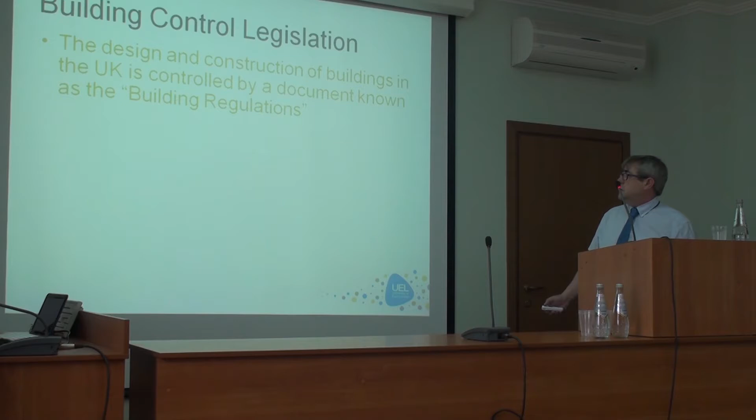So the document we refer to, and this is the technical term for it, is a statutory instrument or a legal document that seeks to ensure the policies set out under the relevant legislation are carried out. So that's the legal definition of what has to happen. Этот документ представляет собой юридически оформленное правило, как должны строить.

So the building regulations are law, in effect, and are a legal requirement for everyone to comply with. Строительные нормативы – это закон, которому должны следовать при строительстве домов.

And that is different from the Eurocodes. The Eurocodes, which we'll come on to, are not law. They are a code of practice. Также он отличается от Еврокодов. Показанный выше нормативный документ является законом, в то время как Еврокоды – это просто стандарты, которым рекомендуется следовать.

However, most people use them as a convenient way of carrying out their structural design. Однако большинство людей используют именно Еврокоды как самый удобный способ строительства согласно нормам.

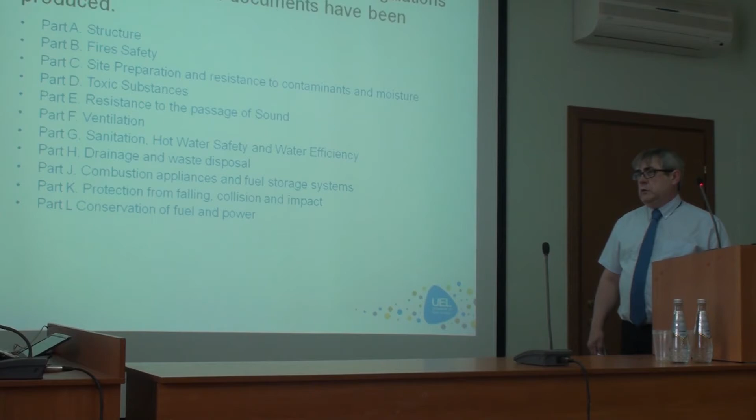Part L: Conservation of fuel and power - effectively this is to do with heat use and how we maintain the heat use within the building, reducing heat loss.

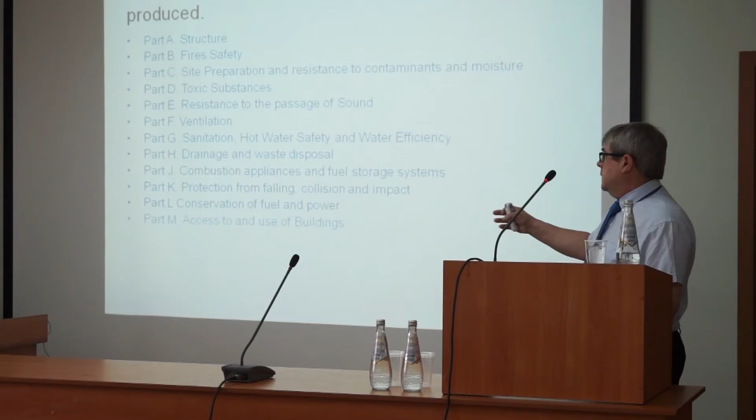Part M: Access to and use of building - that is for disabled access, so the use of the building and the access to the building by people who are impaired in their movement.

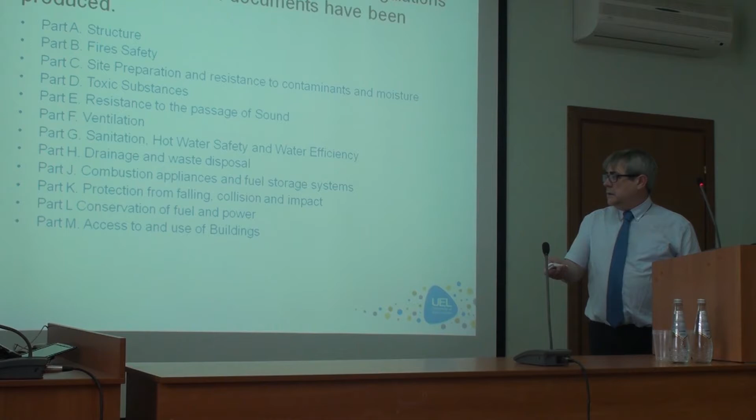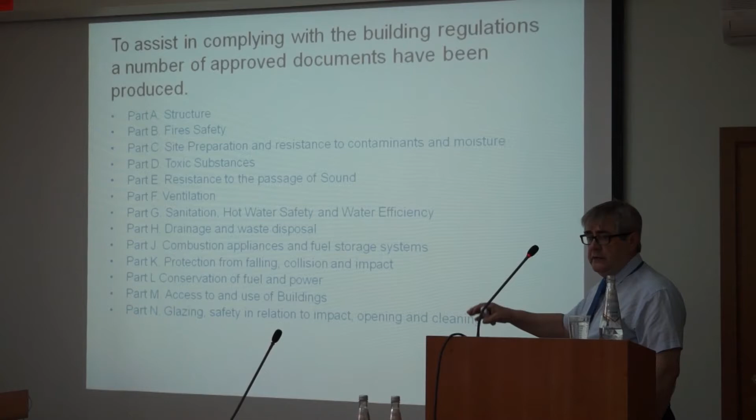Part N is glazing - safety in relation to impact, opening and cleaning. So it's to do with windows: how safe are the windows, making sure they are safe for their use, can they be cleaned, and the way they open.

And Part P, which is the last part, is the electrical safety of dwellings. So all electrical work comes under the building regulations and has to comply with the current standards.

This one in particular is specifically aimed at dwellings or houses, not industrial units or factories - they will be dealt with separately.

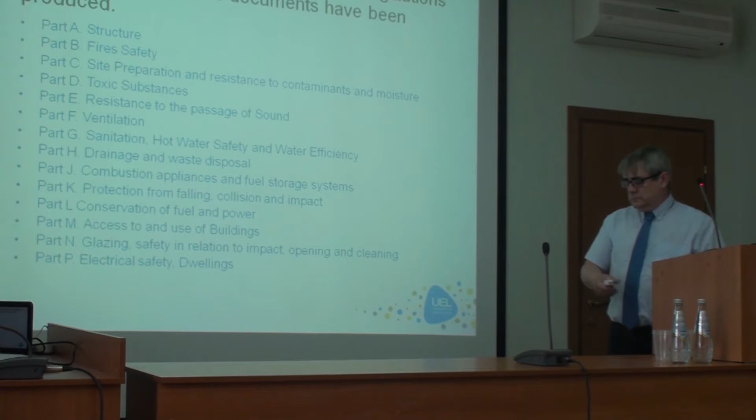Okay, all the approved documents - you can download them free from the internet, so you can access them at any time, and this is the web link. Now we should be able to just open this up from the hyperlink on there.

Все нормативные документы доступны в свободном доступе в интернете. Сейчас мы попробуем загрузить одну из ссылок. The building regulations for the UK are available on what's called the planning portal. Строительные нормативы Соединенного Королевства доступны на этом сайте, и сейчас вы увидите, как они выглядят.

Okay, so these are all the approved documents, and they're all downloadable free, but obviously they're only in English. Здесь вы видите утвержденные документы, которые вы можете загрузить. So if you click on, say, this one, for example, structural safety. Если вы кликните на безопасность конструкции.

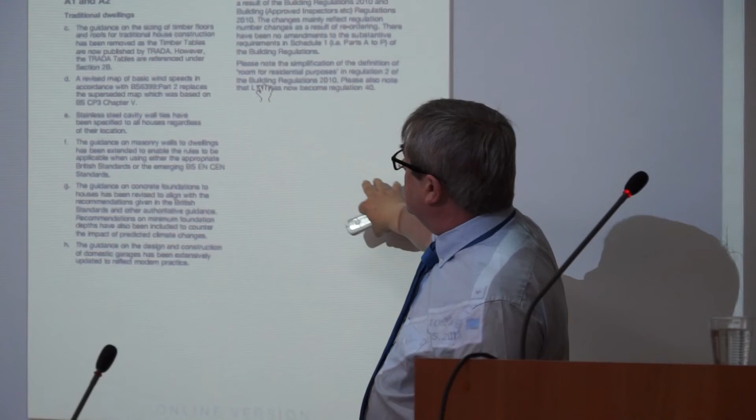And you'll see that as you go through it, the first part tells you how it changed from its last version. On the front cover, it tells you the latest version. This will tell you where we've changed the regulations since 2004. This is 2010 amendments, so it's a 2004 edition, amended in 2010. There haven't been any changes since then. The first page tells you where the main changes have taken place, so if you're familiar with the old code, you will see what the revisions are.

На титульном листе вы видите дату выпуска данных нормативов. На первом листе у вас идут данные об изменениях. То есть, если вы знакомы с предыдущей редакцией нормативов, вы можете просто просмотреть изменения и уже будете в курсе новых стандартов. Если же вы не знакомы с новыми нормативами, то нужно будет изучать весь документ целиком.

Within this one, which is the structural design one, it then tells you what other codes you should be using. So this is not the full code, this tells you where to use what codes. Этот норматив представляет собой нормативы по структурному проектированию. Также он говорит вам, какие другие нормативы вы должны использовать, с какими другими нормативами вы должны быть ознакомлены для продолжения строительства.

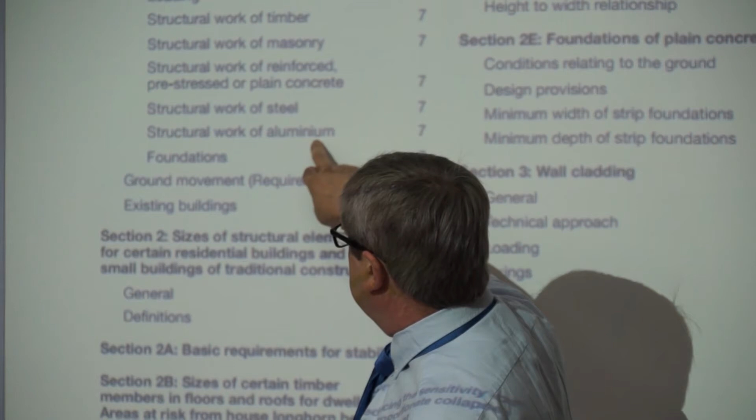То есть каждый норматив посвящен какой-то определенной теме. So if you go up a bit, there's obviously an index, and if you go a bit further, it tells you the different loadings you should take into account: use of structural timber, use of structural masonry, reinforced and pre-stressed concrete, steelwork, aluminium foundations. These are the references that relate to what you should be designing to. Также здесь вы можете найти ссылки на то, что вы должны принимать во внимание - использование древесины, кирпичной кладки, бетона в строительстве, применение нагрузок к данным материалам.

If we just go up a bit more, we can go past the index. So this is the way it's written - it's a very wordy document. But if you keep on going up, okay.

This part here is what the actual building regulations say. So this is the law that says the building can be structured such that combined and imposed loads - it tells you how you should design it, but doesn't give you any other information than that. That is the actual interpretation of the Act, and the rest of the document is to enable you to carry out that instruction. Сначала вы можете увидеть непосредственно нормативы, которые являются частью закона, то есть те требования, которые должны выполняться. Дальше уже вы сможете найти объяснение, каким образом выполняются требования и что вы должны делать.

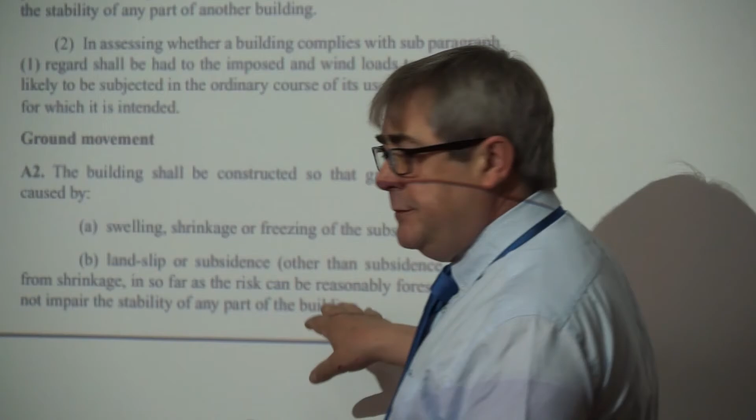So, for example, it says the building should be constructed so that the ground movement caused by shrinkage, swelling, freezing or subsoil slip doesn't impair the stability of the building, but that's all it tells you. То есть, например, здание должно быть построено таким образом, чтобы обеспечить безопасность находящихся в нем людей, но это не дает вам никаких деталей, не объясняет, как это нужно сделать.

So it's up to you as a designer to comply with that and make sure the design you do is not affected by these conditions. И это ваша задача как проектировщика решить данную проблему и построить такой дом, который соответствовал бы требованиям, но отражал ваши идеи.

If we go up a bit more, just keep going, I'll tell you when to stop. That's okay, yeah, keep going. Told you about the codes of practice, and then go on.

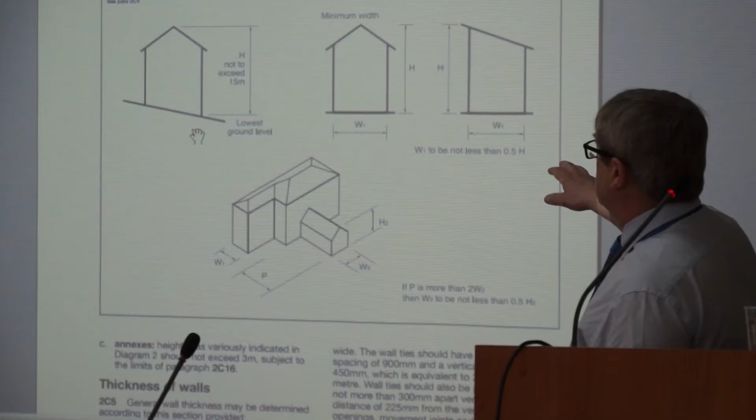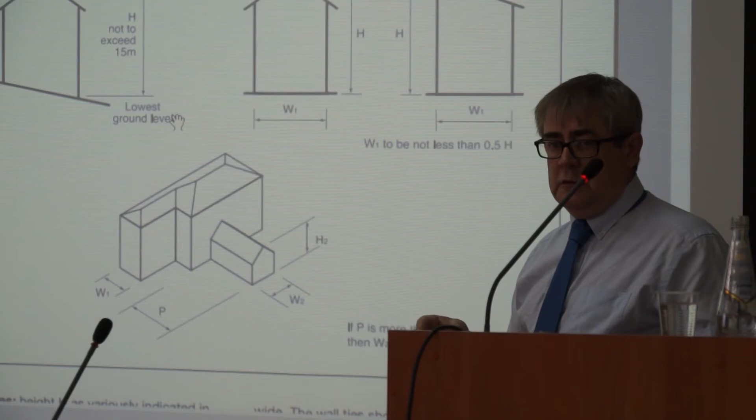Okay, there's some guidance on the restrictions on this particular code. This gives you the size and proportions of certain buildings that the code applies to. Outside of that, you need to use general engineering principles for your design. This relates to certain sizes and limits the design.

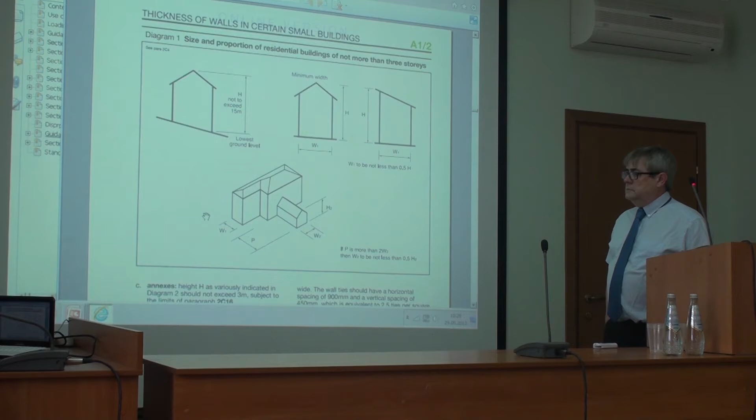Just up a bit more, and I think we'll go back to the normal slides. So it gives you all of these diagrams about how you can interpret and effectively the scope to which this code will apply.

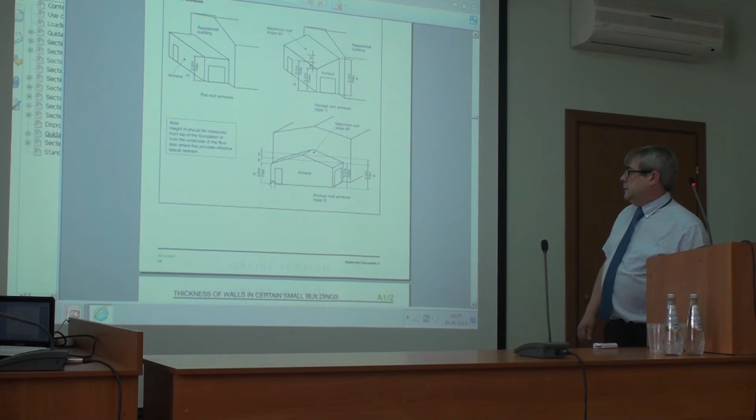Okay, if you go up a bit more, that'll be it. So it gives you certain parameters for the way you can use particular things that only relate to this code.

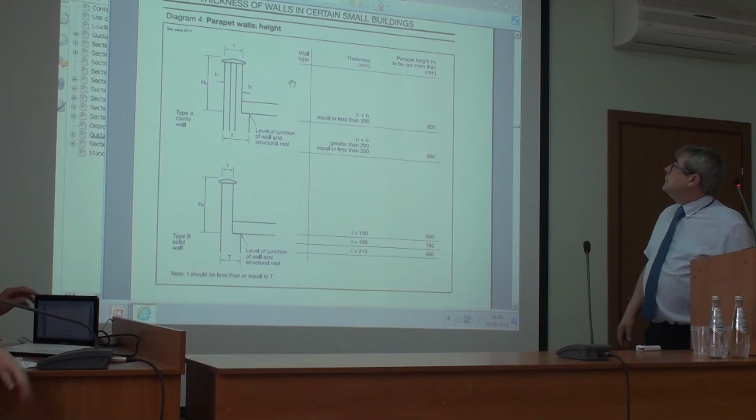Can we go back to the presentation now? That's it, thank you.

So these documents are very extensive, but they're not exhaustive. In turn they refer to additional documents, such as the Eurocode and previous British standards.

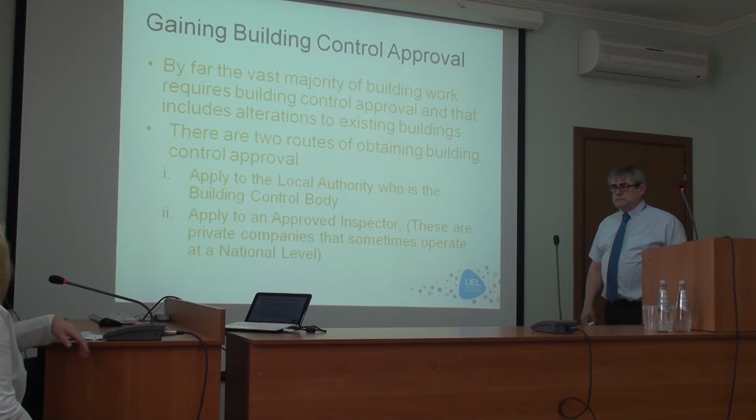The approved inspectors are relatively new. They are a recent addition to the construction industry.

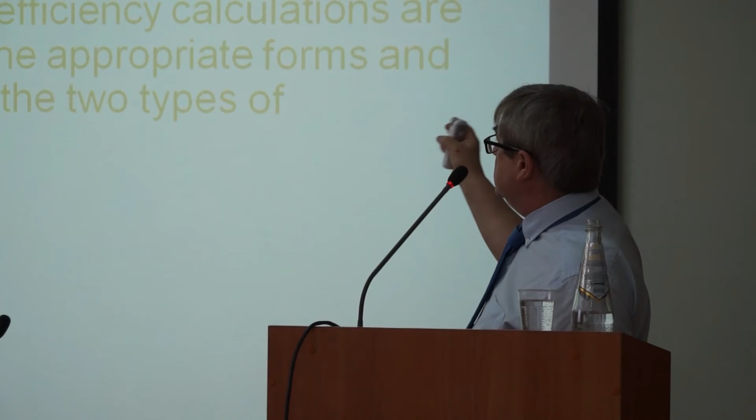So the process of obtaining building control - they're the people you apply to. What you need to do is produce your working drawings and any associated calculations, required energy audits or efficiency calculations, and submit them with the appropriate forms and a fee to either of the two organisations.

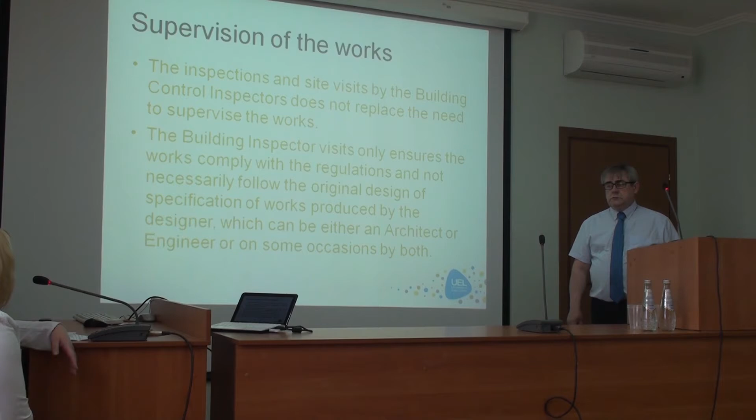Planning control, I thought I'd throw this in as well, is something slightly different. So building control, it doesn't mean that you have the permission to build a building.

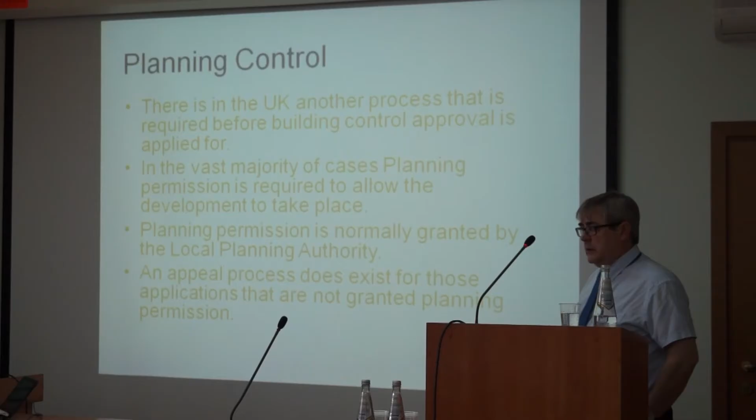Instead of going through all the documents, they're free to download, but the principles are there. They're the processes that we would need to go through in order to build a building.

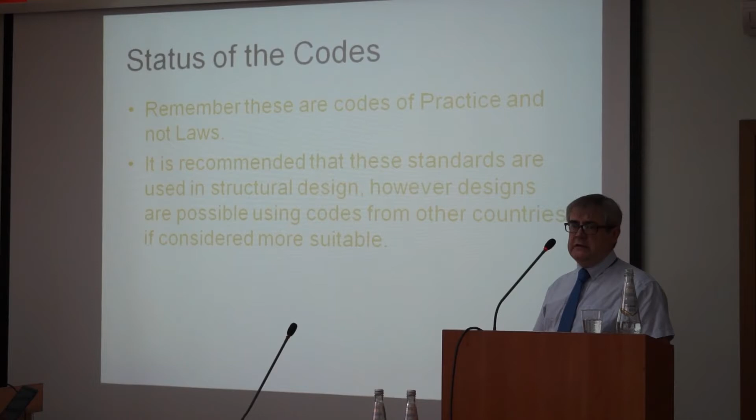The majority of companies will use in the UK the Eurocodes because it's most appropriate and it's easy to follow. But there will be certain cases, because all codes throughout the world are based on the same principles of engineering design.

В Соединенном Королевстве чаще всего используются еврокоды, потому что они наиболее простые в использовании и соответствуют всем требованиям. Однако большинство кодов построены на одних и тех же принципах, то есть вы можете варьировать в зависимости от своих пожеланий. But there will be subtle differences between some of the codes, and some will allow certain conditions that others won't, and therefore in certain circumstances, in very extreme conditions where you're designing something very specific, it may be appropriate to use an alternative code.

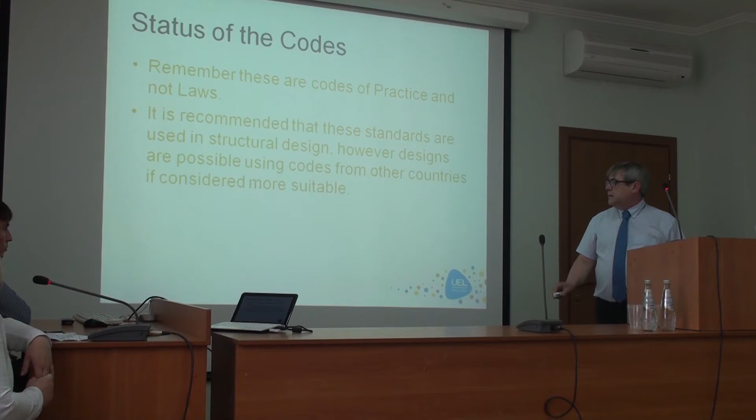Однако существуют и различия в каких-то свойствах, то есть если ваш проект специфичен и если он отличается от всех остальных, если у вас какие-то особые условия, то вы можете использовать именно те коды, которые подходят вам. But you can produce your designs using the fundamental principles of the use of structural concrete or structural steel. However, you need to demonstrate in your submission that you comply with the fundamental grounding rules of engineering. При проектировании вы можете пользоваться всеми фундаментальными принципами, однако при оформлении документов вы должны перечислить, какие требования

вы соблюли и какими кодами и стандартами пользовались. So all the structural calculations you do for the design of a building, a roller coaster, or a retaining wall will be checked by the inspectors, first of all as independent inspectors. Вся информация, которую вы указали, будет проверена независимым экспертом.

So, Eurocodes. These are a new set of European structural design codes for building and civil engineering works, and intend to be mandatory for all European public works, and likely to become the ones adopted by the private sector, but they don't have to be. The intention really was for public works, and to bring some harmony across Europe and comparison between different countries, to have the same designs.

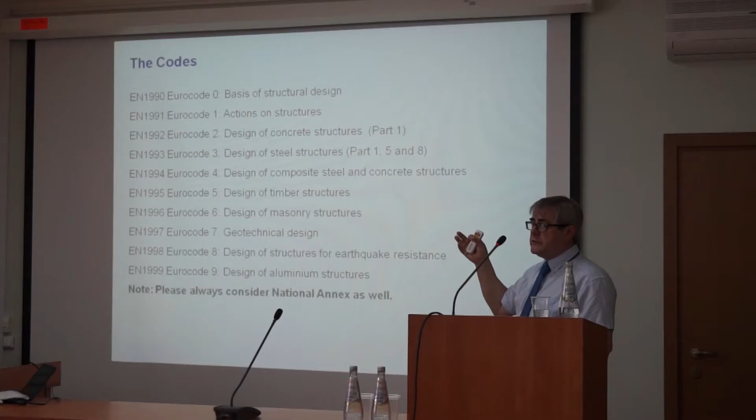They're split into different materials, but the very first one is the basis of structural design, how structural design should be carried out, and the next one, code 1, is the actions on structures - that's the loads applied, what load will be applied to the structure and how.

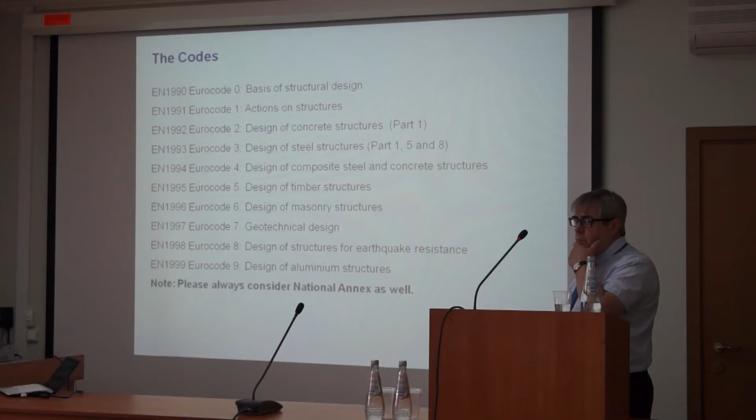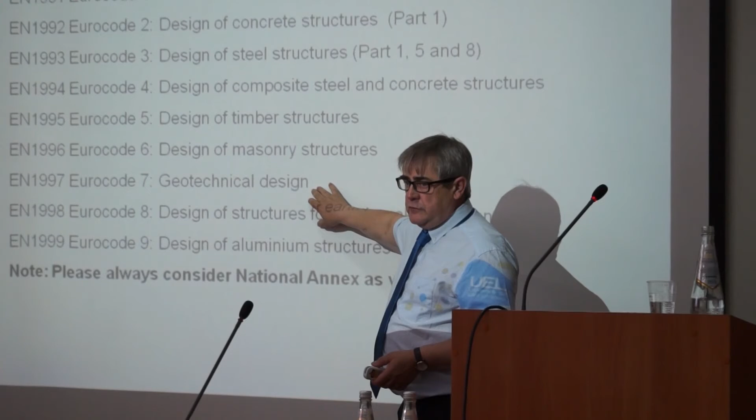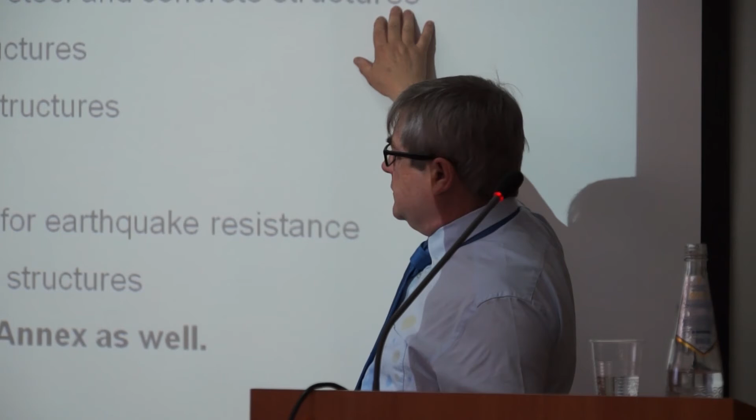So these are all ultimate limit state design, and for the UK the biggest change was in timber structures and geotechnical design. The rest were very much limit state design before we started changing to Eurocodes. Concrete and steel were always in ultimate limit state. Composite structure probably wasn't, but definitely timber and geotechnical design were not in limit state. So these have been the biggest changes to us operating the Eurocodes.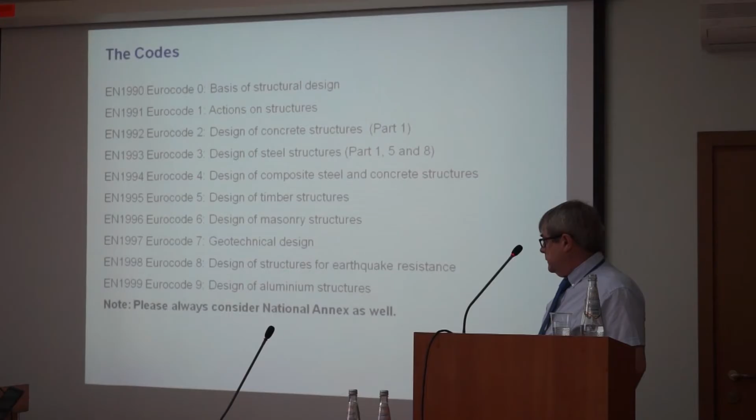Okay, but with all of these, you still have to apply the national annex to each one. So, for example...

This is the website for the Eurocodes, but they're not free.

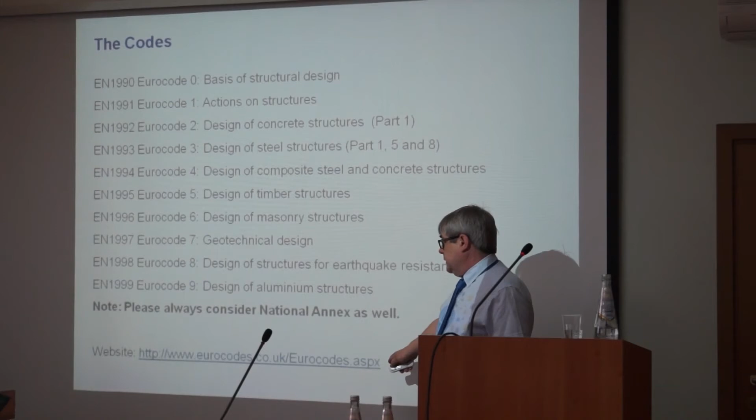Okay, so for example, if we look at the Eurocode design of concrete structures, this is the front cover of the Eurocode.

And then there's a national annex, which is general rules and rules for buildings. So you need to read both of these together to be able to design reinforced concrete.

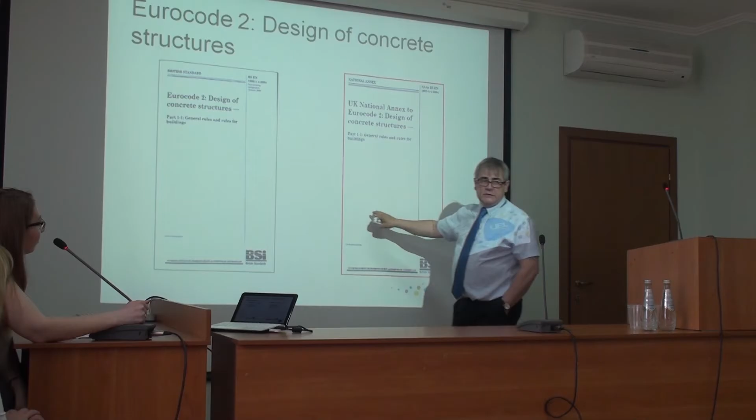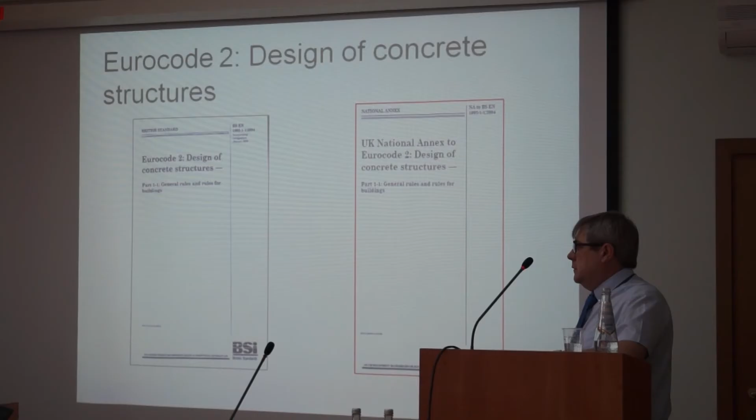So you're probably more than aware that the analysis of the structure will use fundamental tools and software to analyse the way the structure behaves. However, it's then how you transform that information from the analysis into the design of the member that will then resist the loads applied.

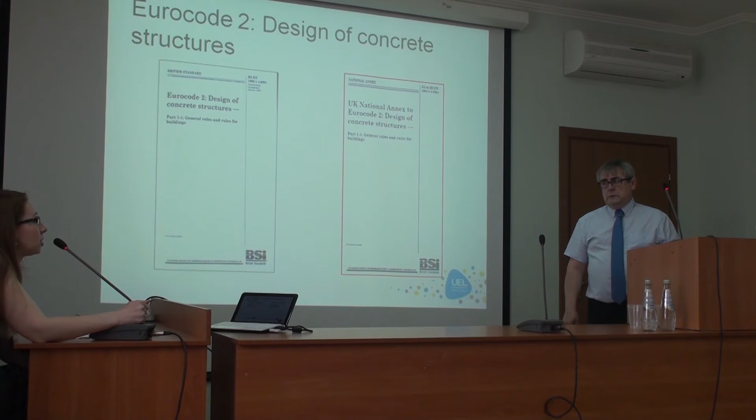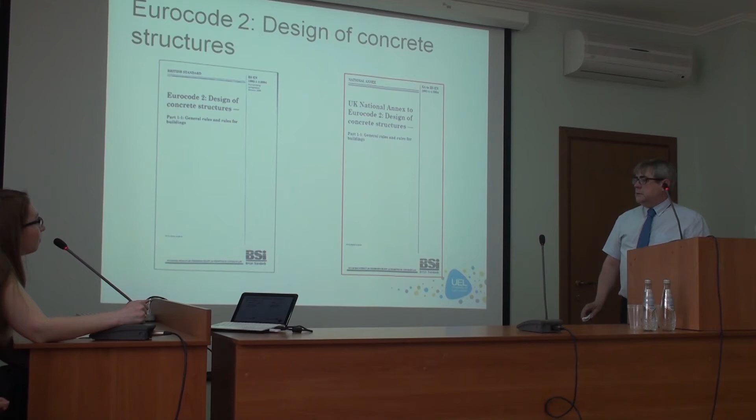So it distinguishes principles and application rules. So this is, I'll open it all up. Okay, so the principles, the general statements, definitions, there's no alternative.

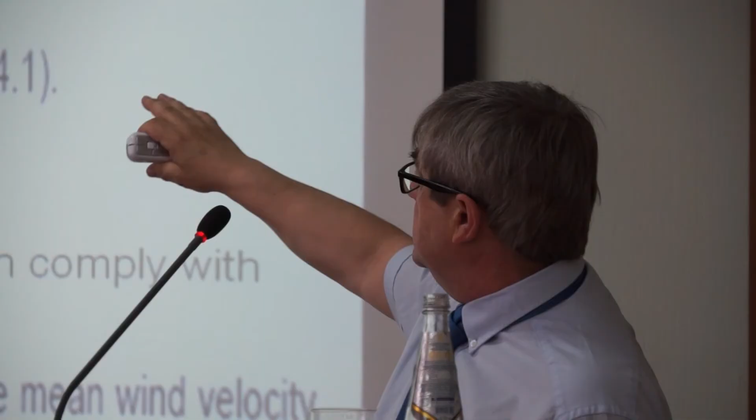Requirements and analytical models, which there's no alternative. Is permitted unless specially stated. What they're trying to say is that the code says you shouldn't use anything other than this. However, you can use alternative ways of designing things. This is what's preferred, and this tells you the principles which can be changed and which can't be changed. And it's a matter of reading through the codes to understand in depth what you can and what you can't do. It's far too complicated to go through anything other than that.

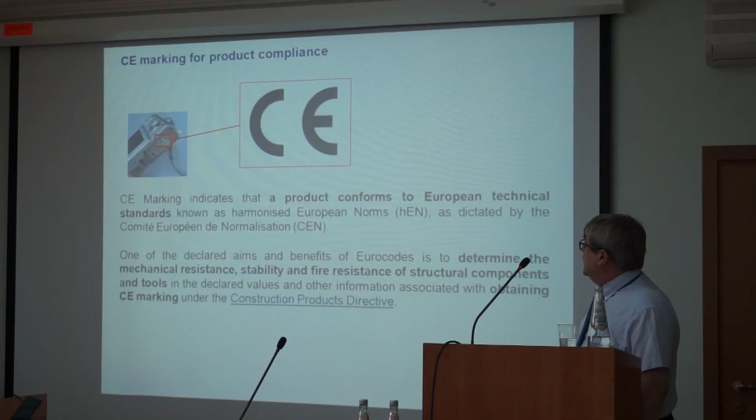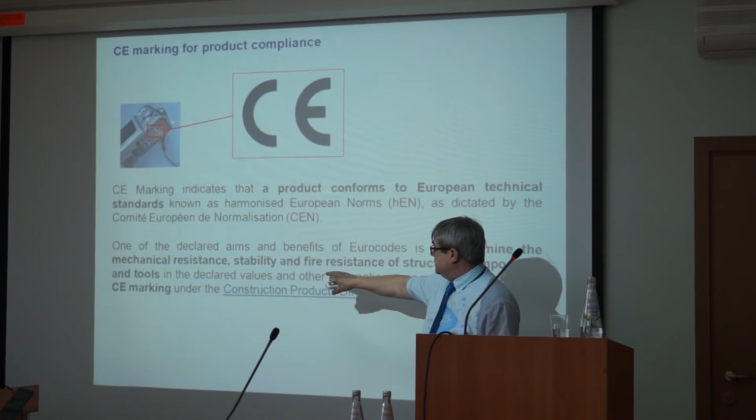And it's all to do with effectively the CE marking. So CE is a European technical standard for harmonised norms throughout the EU, and part of this is to determine the mechanical resistance, the stability, fire resistance of structure components, and that complies to buildings as well. So effectively, when you carry out your design in accordance with the Eurocode, you are complying with the CE marking.

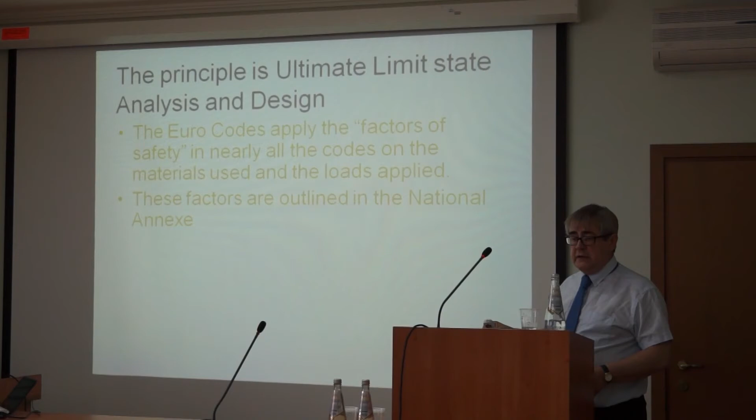What's live load? Live load, people walking about.

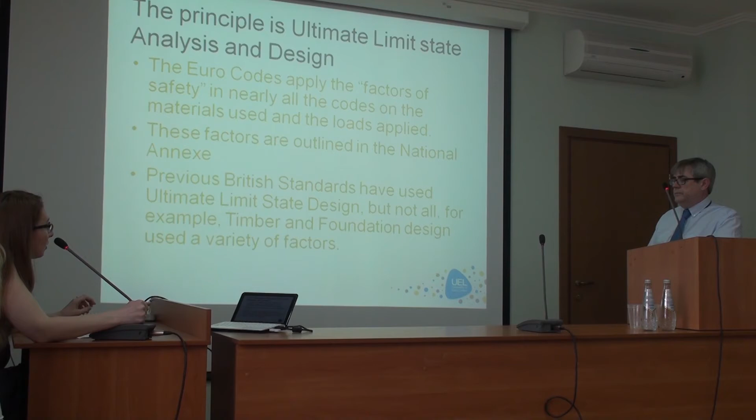So limit state design, this you're probably very familiar with, so I'm not going to go through it in great detail, because I'm sure it's the way that you design things anyway. But limit states relate to beyond which the structure will not satisfy the considered requirements.

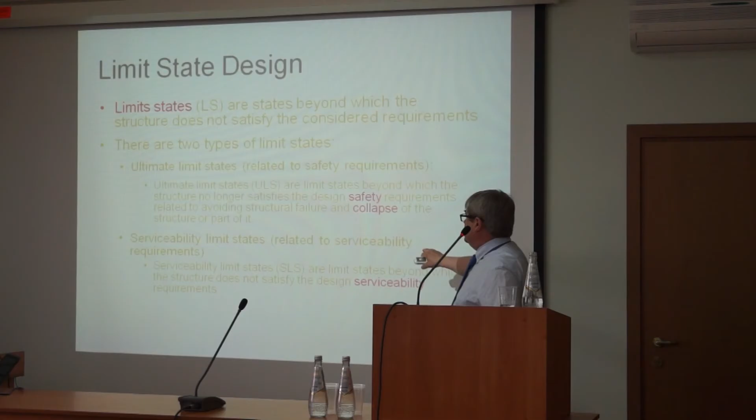Okay, well, this is just to ensure that it doesn't collapse, and this is to ensure it's serviceable. And the serviceability and collapse are two different things. For example, on a timber floor, it may sag too much, and that will then fail under serviceability, but not collapse.

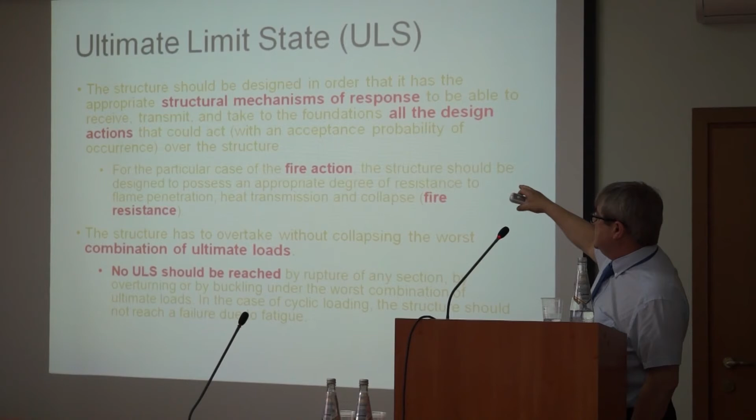And then ultimately, the structure should be designed in order that the appropriate structural mechanisms of response are able to receive. This is really the definition of ultimate limit state. I think they can read it afterwards, but this is saying to you, effectively, that the structure will respond to the loads applied without failure.

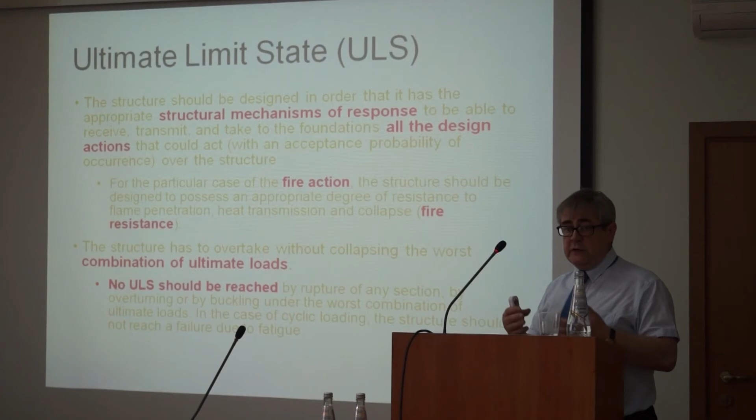And this is all based on probability. So the loadings that apply have a statistical nature.

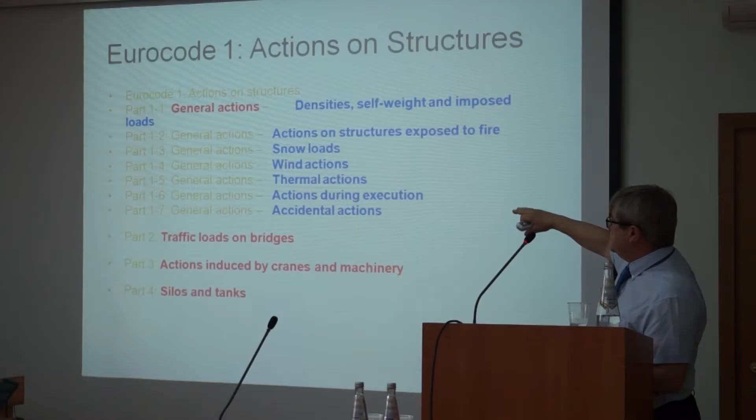If you look at Eurocode 1, very briefly, it looks at the different actions that take place. These are the actions that would have to be applied to the structure: densities, self-weight and imposed loads on the structure, actions on structures exposed to fire, and as you can see, snow, wind, thermal.

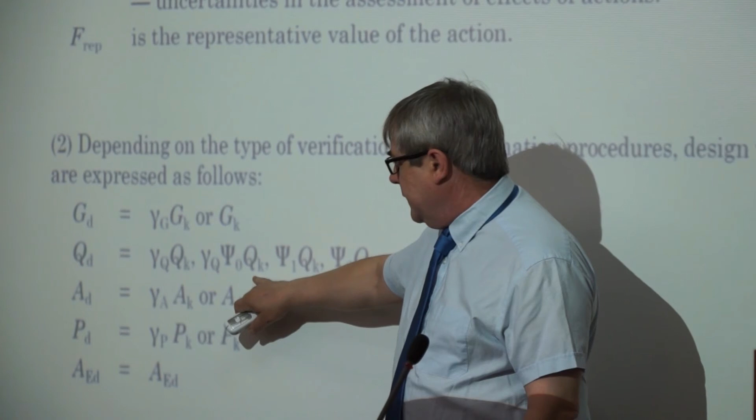So there's various parts of the code, and you would relate to all of those. This is the way the code is made up and how the loads are applied. For this particular talk, it's too complicated to go through how you apply all the different factors, but you can see the factors and these are the components that make up the load. So QK would be an applied load, and these are factors that you add to the load or multiply through to get your ultimate loading. There's a combination of different expressions used, but you need to read through the code and look at some of the guides on how to apply those factors.

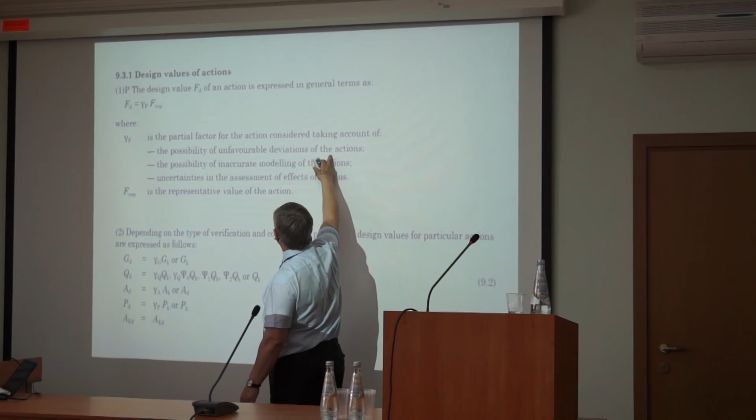For this example, this is a partial factor. This will take into account unfavourable deviations from the actions, the possibility of inaccurate modelling. There'll be a factor you use, and that depends upon your quality control and what material you're dealing with.

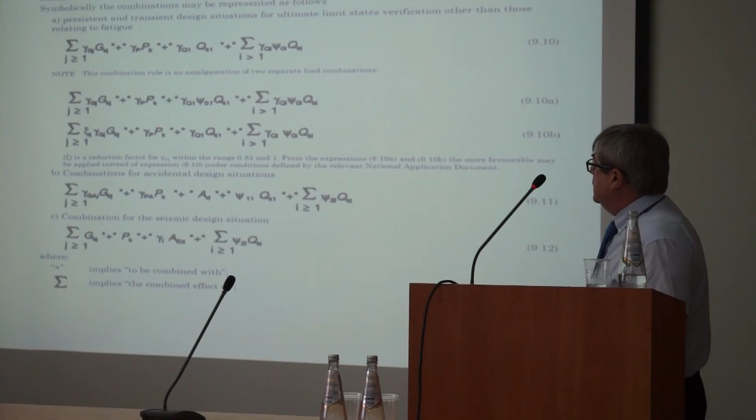You can see the combination of codes are made up. At the very top, there's design values for actions in use of combinations. So persistent, transient, accident, seismic have different values, and it's a summation of these different values that give you your ultimate loading.

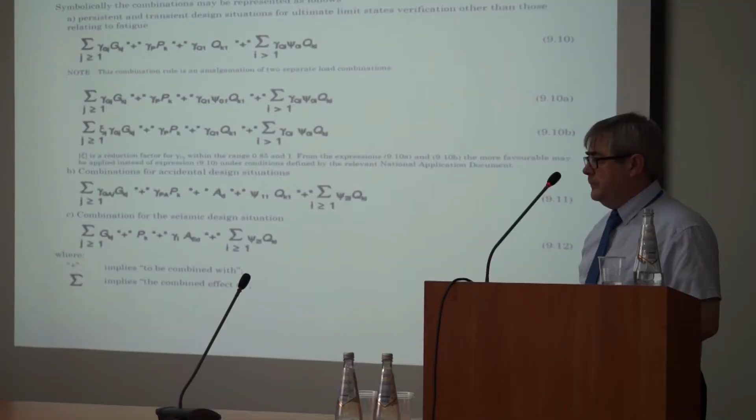These look far more daunting than they actually are.

Scary? These look frightening. Yes, definitely. Too many things.

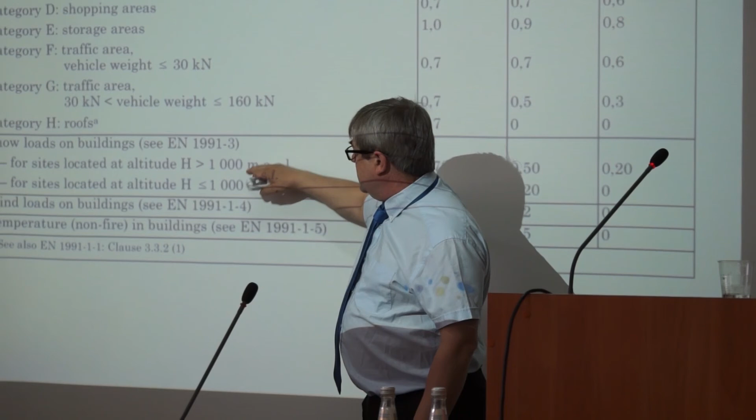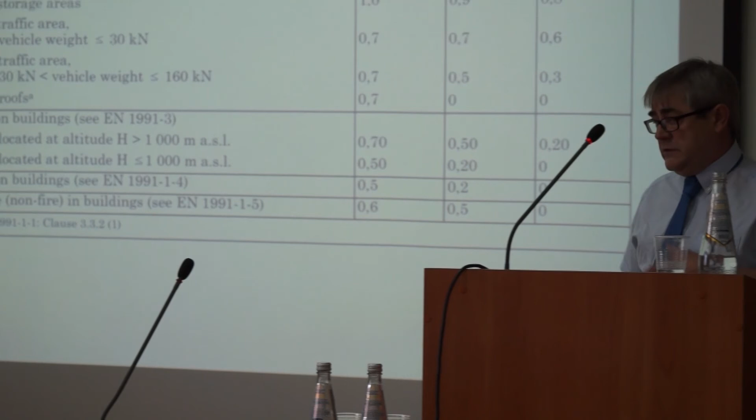So if it's a residential building, an office building, or a shopping area, you have different factors depending upon the building use, and then for snow loadings at different locations. At a height of 1 kilometre above actual sea level, less or above, you have different factors depending on the snow loadings of the building, and the same applies to wind loading. In the upper part of the table we see these factors differ for different types of buildings, whether office, shopping centre, or warehouse. The second row contains data characterizing the effect of snow on the building, also depending on the level above sea level at which the building is located, you take one parameter or another.

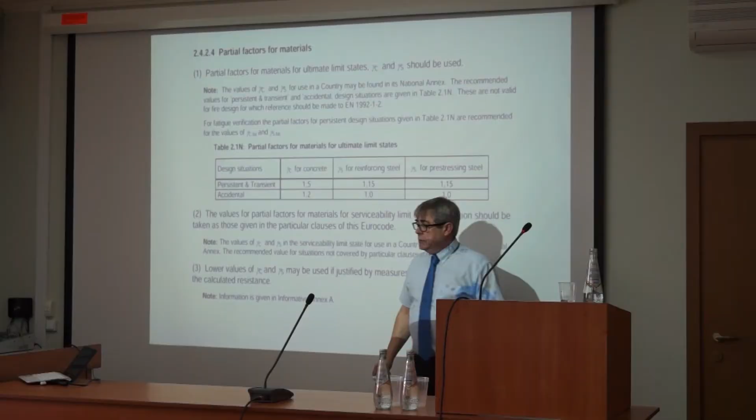For example, concrete would have a 50% increase, whereas steel only 15%. The quality control in producing steel is far greater than the quality control in producing concrete. According to this table, it turns out that using steel is better than using concrete, and the parameters prove it. You can see the same for pre-stressing steel as reinforcing steel — the quality control in producing that particular product is far better than something made up on site, and the use of pre-stressed steel also turns out to be the better option.

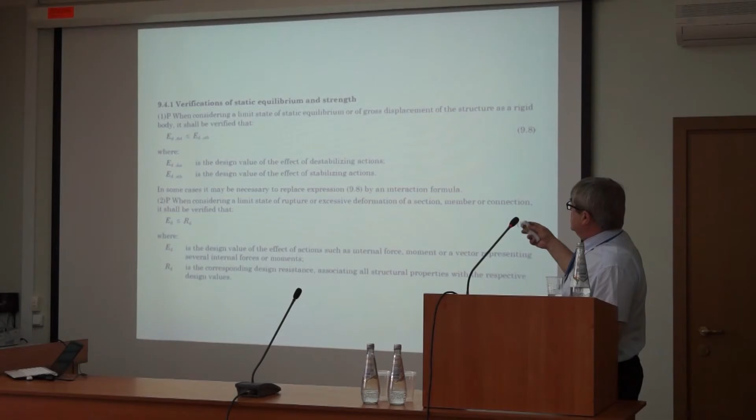These are just parts of the code that talk to the stabilising action. I think you would need to go through the code and see it looks at various parts of it, so when you're first designing, and then further on, how it's made sure that it's stable. In order to design a building you naturally need to study the code itself and read all the information about it.

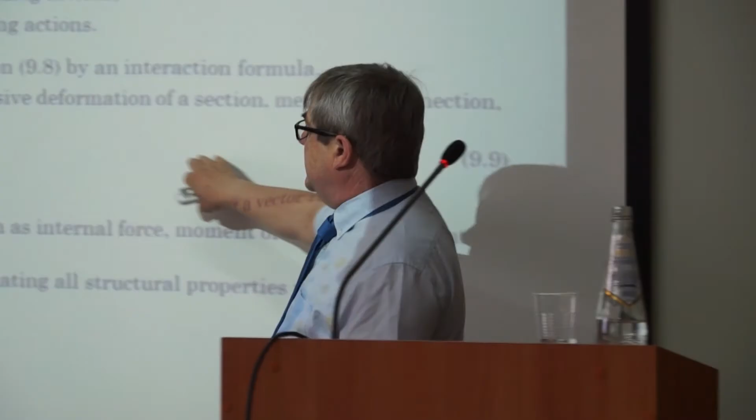This is really to do with excessive deformation and rupture, so you need to look at all aspects of the structure, not just the load applied to it. That is, if you're considering the possibility of deformation of the structure, you must consider all aspects, not only the load that may be on the building.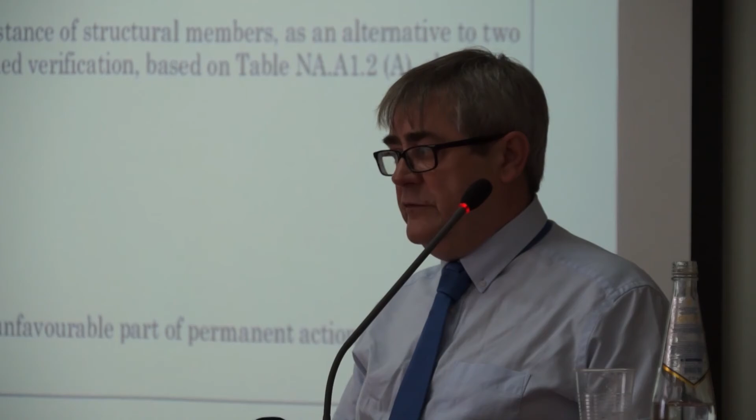For example, in a steel beam, if you place the load on top of the beam, it has a destabilizing effect; if you hang the load from the bottom of the beam, it has a stabilizing effect. That is, if we take a steel beam and apply the load on top, we get a destabilizing effect; if from below, then on the contrary, a stabilizing one.

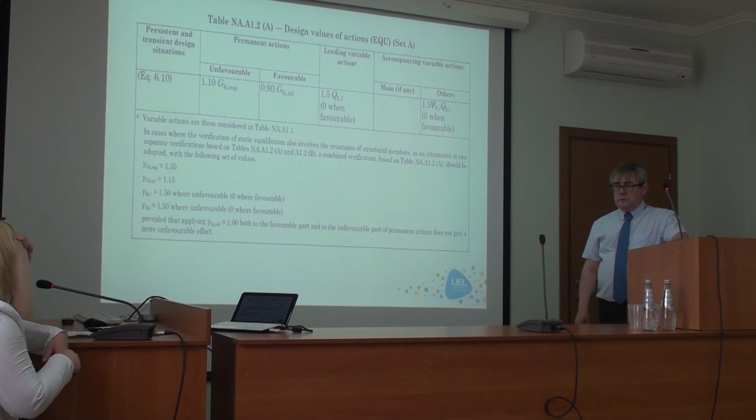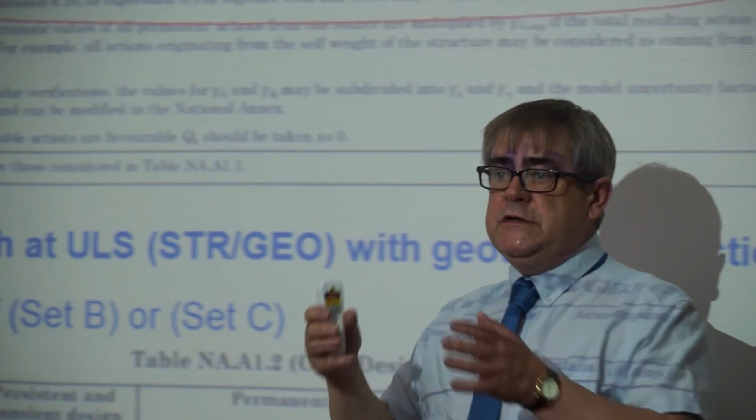This pulls out parts from the code relating to geotechnical actions. You can see again a similar sort of expression carried out, unfavourable loading and favourable loading, depending on whether in a geotechnical structure the load is applied to the wall tending to turn it over, or whether the soil is supporting the wall. Here again you see excerpts from the codes relating to geotechnical parameters, again there are desirable and undesirable parameters, and it all again depends on the load. That is, if the load on the wall is applied from the inner side it tends to overturn or collapse it, or the load comes from the other side and supports the wall.

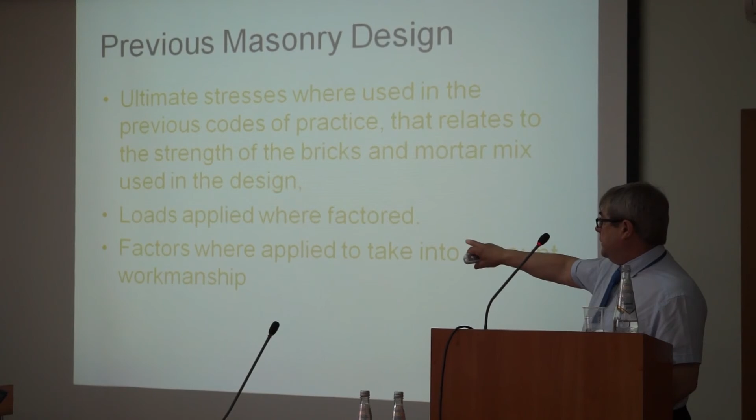Previously when we used masonry design, we used ultimate stresses in the previous code, relating to the strength of the mortar mix. So we would have designed it slightly differently before than we currently do under the Eurocodes. We look at a different way of designing, and the loads that were applied were factored.

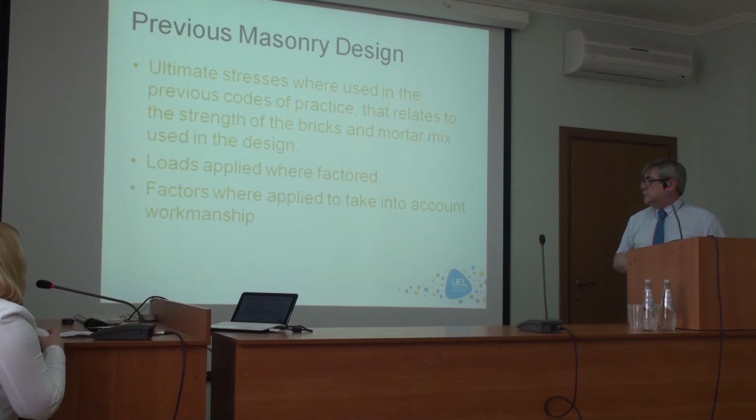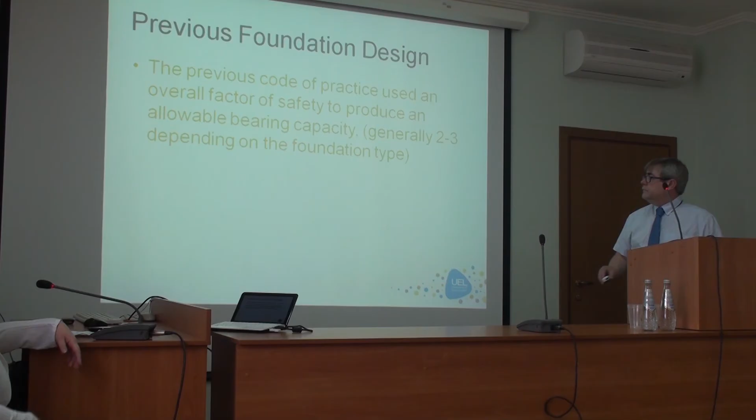If your students are able to access our UEL website as UEL students, there is a process that allows them to get hold of the Eurocodes. We access our website here, but you need to have an Athens account. Our students on campus can access these codes without buying them, because we subscribe to a database.

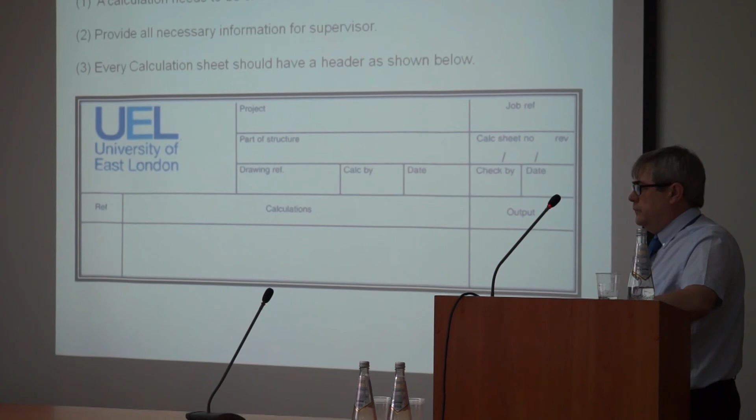Также указывается дата выполнения, имя инспектора, который проверил данную схему, данную детализацию, когда он это сделал. Также указываются ссылки на те коды, которые вы использовали.

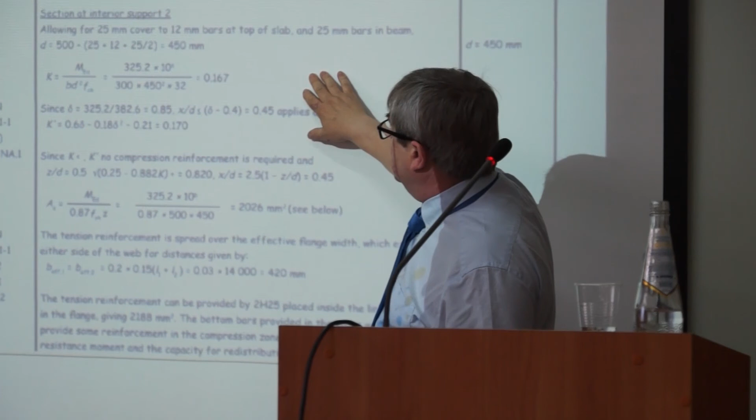Okay, and they look like this. So this, effectively, the reference is what part of the code has been used, what clause number, what table number, the calculation that goes with it, and then the output, what the solution is. So, for example, this was looking at design a beam, and this has told us that the depth of the beam is 450 millimeters. So the output comes here, and you can see a summary of the design here.

This has been done on a computer. Quite a lot of calculations are done by hand, and if you use computer software, it will produce it in that format.

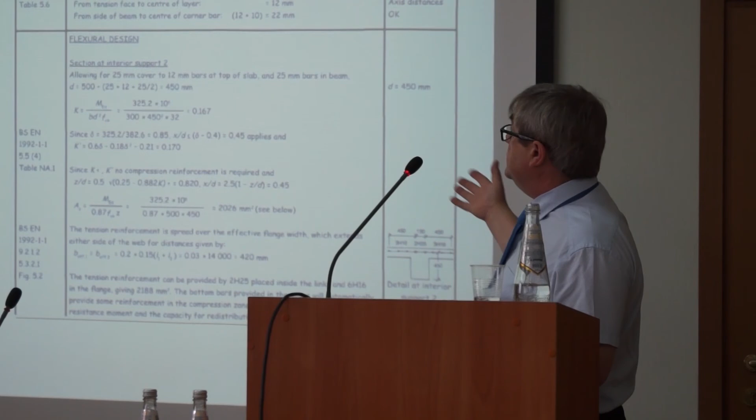Здесь вы видите как раз пример данной таблицы, форма, которая была показана на предыдущем слайде. Первая колонка – это ссылки на коды, то есть именно какой код был использован, какая его часть, какой пункт, подпункт и так далее. В средней колонке идут расчеты, формулы, то есть как вы вычисляли тот или иной фактор. И в последней колонке идет результат ваших вычислений и решение предлагаемой проблемы.

Данная таблица может заполняться как вручную, так и с помощью компьютерной программы.

So I don't mean to be derogatory, you may already do this, but it's just the way that it's done in the UK. Может быть, вы это и не делаете, но в Великобритании делается именно так. So reference, calculation and comments, output, and that's it. И на этом презентация закончена.

Thank you very much. If yesterday I was scared that my student would go to London, today I don't fear, because I will invite Professor Hassan, Professor Ford, and his colleague to our university. Oh, thank you. Please, your questions for Professor Ford. Пожалуйста. Пожалуйста.